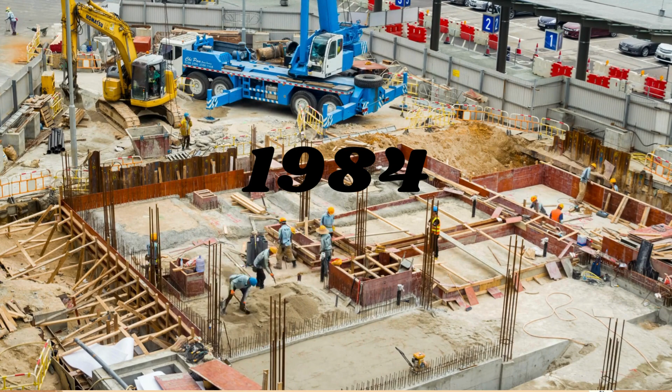The Shell Scotford complex, located near Edmonton, Alberta, is a key facility in Shell's global energy network. Since 1984, it has been integral to Canada's energy infrastructure, showcasing an innovative and integrated approach to energy production.

About the core operation, the complex comprises a bitumen upgrader, oil refinery and chemical plants, enabling it to process oil sand into synthetic crude oil and produce fuel and essential chemicals that support various industries.

Next is about environmental commitment. Shell Scotford complex has a standout feature in the Quest Carbon Capture and Storage (CCS) facility, one of the world's first large-scale CCS projects. It captures over 1 million tons of carbon dioxide annually, reinforcing Shell's commitment to sustainability and climate action.

Next, what are the processes that are implemented at Shell Scotford complex in Canada? Firstly, atmospheric and vacuum distillation unit. They use a moderate temperature, low pressure process to separate the bitumen into its constituent hydrocarbon elements. Distillate products removed from the bitumen are pumped to the residue hydroconversion unit.

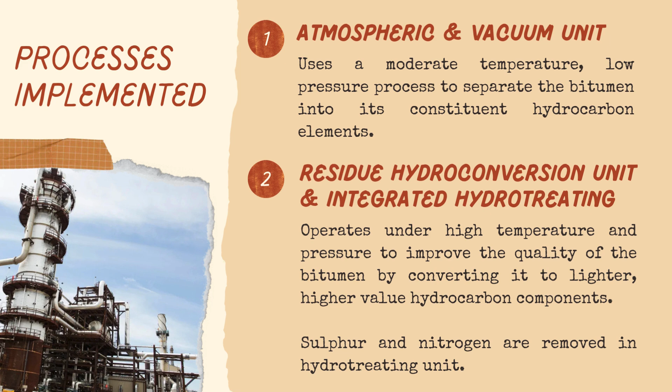Next, the residue hydroconversion unit operates under high temperature and pressure to improve the quality of the bitumen by converting it to lighter, higher value hydrocarbon components. Sulfur and nitrogen are later removed in the hydrotreating unit to further improve the quality of the product. Number 3. Hydrogen manufacturing unit. It produces high purity hydrogen required as part of the conversion of bitumen to high-quality petroleum products.

Number 4. Sulfur recovery unit. Sulfur is recovered from the bitumen in the upgrading process. Recovered sulfur can be converted into liquid sulfur, which enables Shell to move the sulfur to broader markets.

Number 5. Solvent de-asphalting unit. It processes atmospheric residue from the residue hydroconversion unit, producing streams of both lighter oil and asphaltenes. The de-asphalted oil from the unit can either be further refined or blended directly into Shell synthetic crude products. Asphaltene from the unit can either be blended into fuel oil products or sent for gasification.

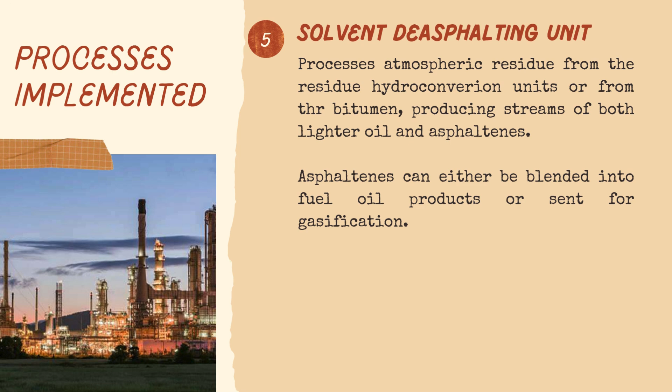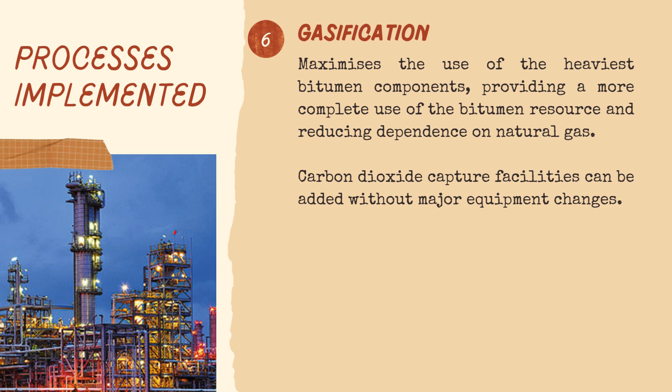Number 6. Gasification. Shell is also considering including a gasification unit in association with the upgrader projects to produce hydrogen and fuel gas. Gasification maximizes the use of the heaviest bitumen components called asphaltenes, providing a more complete use of the bitumen resource and reducing dependence on natural gas.

Number 7. AOSP Diluent Recovery Unit. AOSP stands for Athabasca Oil Sands Project. Oil sands consist of clay, sand, and other minerals coated in water and thick, viscous oil called bitumen or asphalt. To get usable oil from this mixture, producers have to separate the bitumen from the sand using hot water and then process the bitumen into crude oil.

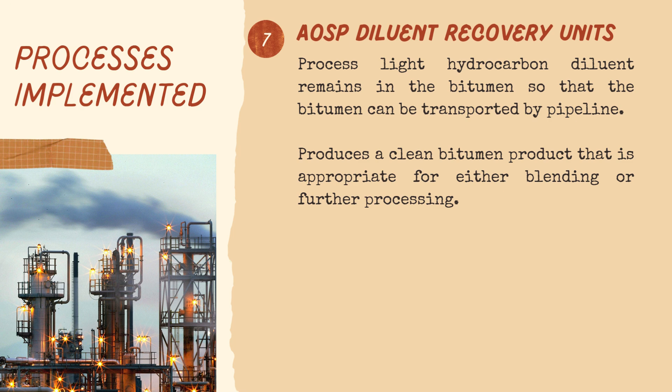This unit processes the light hydrocarbon diluent that remains in the bitumen so that the bitumen can be transported by pipeline. This diluent needs to be recovered from the bitumen and recycled. To recover the light hydrocarbon diluent, the diluted bitumen mixture is heated, vaporizing the light hydrocarbon diluent product, which is then cooled into a liquid and returned to the mine for reuse. It produces a clean bitumen product that is appropriate for either blending or further processing.

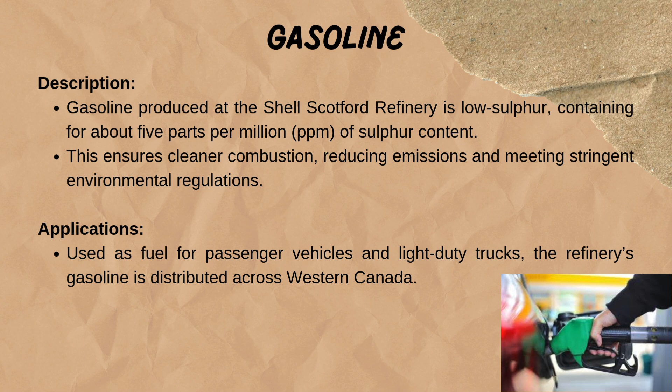Next, I will present about the product of this company. The first product is gasoline. Gasoline produced at the Shell Scotford refinery is low sulfur, containing about 5 ppm of sulfur content. This ensures cleaner combustion, reducing emissions and meeting stringent environmental regulation. It is used as fuel for passenger vehicles and light-duty trucks. The refinery gasoline is distributed across Western Canada.

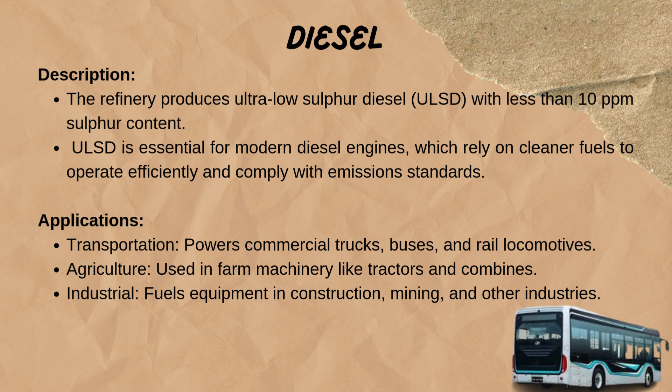Next product is diesel. The refinery produces ultra-low sulfur diesel with less than 10 ppm of sulfur content. Ultra-low sulfur diesel is essential for modern diesel engines which rely on cleaner fuel to operate efficiently and comply with emissions standards. It is used in transportation, agriculture, and also industry.

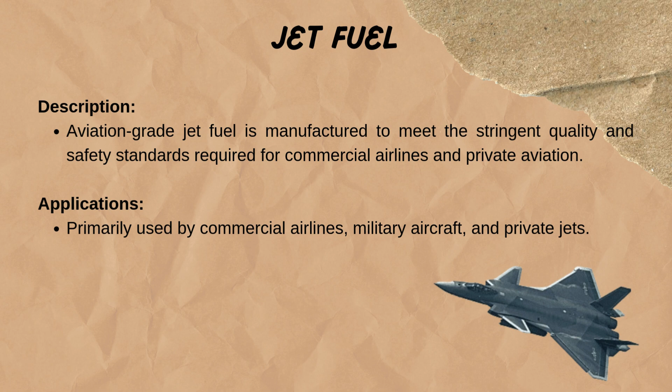Next product is jet fuel. Aviation-grade jet fuel is manufactured to meet the stringent quality and safety standards required for commercial airlines and private aviation. Primarily, it is used by commercial airlines, military aircraft, and also private jets.

Next product is propane and butane. Propane is a byproduct of oil refining that is a versatile and clean burning fuel. It is used for residential heating and cooking, automotive propane for vehicles, industrial uses like metal cutting, and as a feedstock in petrochemical plants.

Butane is a light hydrocarbon primarily used for gasoline blending during the colder months as it helps with fuel vaporization. It is used for seasonal gasoline blending and as industrial feedstock for petrochemical manufacturing.

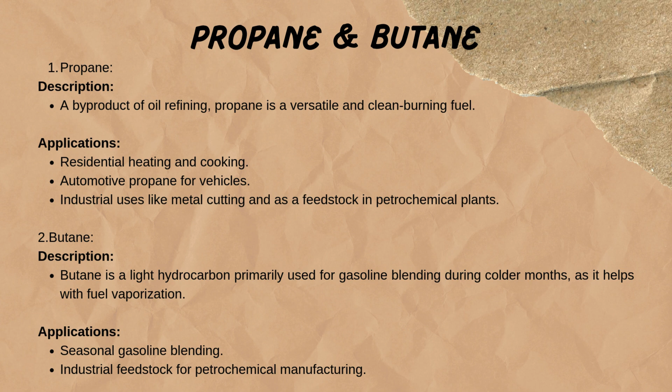Lastly, benzene. Benzene is a clear, naturally occurring liquid hydrocarbon that is a component of crude oil and natural gas. During refining, benzene is separated and purified. Benzene produced at Shell Scotford is sent to the adjacent chemical plant to manufacture styrene monomer. Styrene monomer is used as an essential raw material in producing polystyrene, which is used in food containers, safety equipment, insulation, and car interiors.

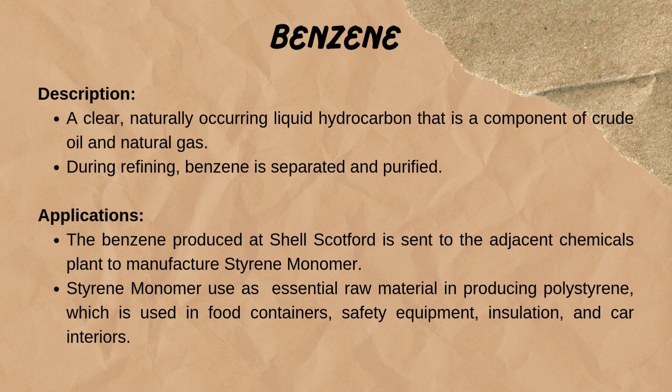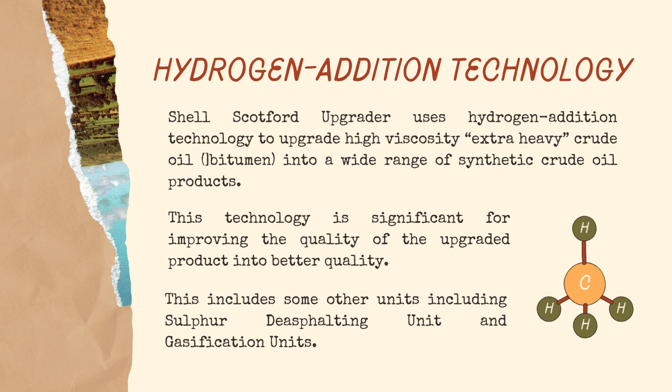Next, I'll continue with the latest advancement or technology adopted by Shell Scotford Canada. Shell Scotford Canada uses an upgrader that utilizes hydrogen addition technology to upgrade high viscosity extra heavy crude oil or bitumen into a wide range of synthetic crude oil products. This technology is significant for improving the upgraded product into far better quality. This includes some other units including the solvent deasphalting unit and also gasification units.

For the gasification unit, the main process is the gasification of heavy oil product for the production of hydrogen and power. This technology in the hydrogen addition technology aims to maximize the use of the heaviest bitumen components and reduce the dependency on natural gas.